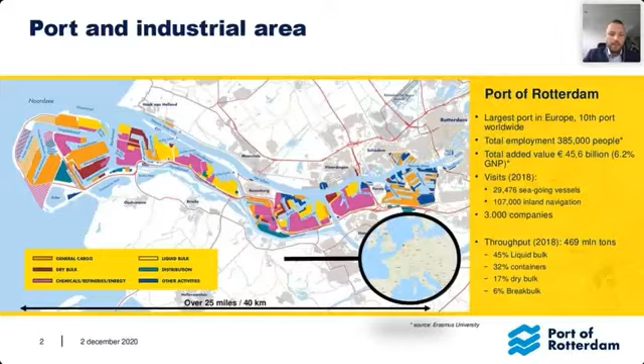So if we zoom in a little bit closer, we see that 13% of the energy demand for Europe represents around 8,800 petajoules. And just 5% of that sticks within the Port of Rotterdam. That 5% represents 20% of the total Dutch CO2 emissions, and in volume, it's around 29 million tons of CO2 emissions, every year.

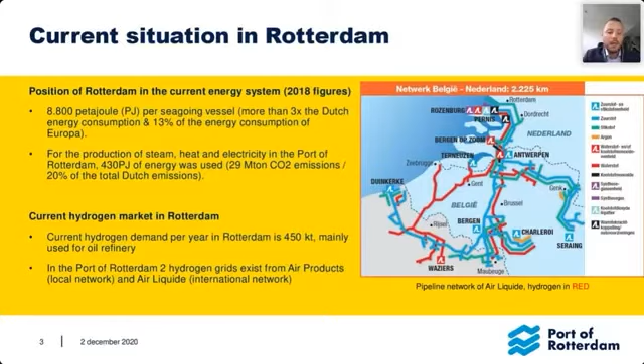And if we zoom in a little closer, we also see that from that 5% energy, there is already a large-scale hydrogen market in the Port of Rotterdam. Almost 500,000 tons of hydrogen is produced and consumed each year in this area. There are 2 pipelines in the Port of Rotterdam, one even connecting the port with different locations in Belgium and France. Those 2 pipelines are privately owned. The one on the right-hand side is from Air Liquide, shown with the red lines. It's the hydrogen pipeline of Air Liquide, connecting the international hydrogen market.

But what I want to do is focus on the 2050 ambition that we have. In this vision, we expect in 2050 around 20 million tons of hydrogen will flow through the Port of Rotterdam to somewhere in the northwestern part of Europe. In that ambition, we took into account a significant increase of energy efficiency in the future, and we also expect that part of the hydrogen production will be done locally, not like today with fossil fuels coming from other regions. So still we need 20 million tons, and we expect that 90% of those needs to be imported.

This can be done from regions where solar power is cheap, converting it into hydrogen and then shipping it towards, for example, the port of Rotterdam. And 2 million tons is what we expect to produce locally.

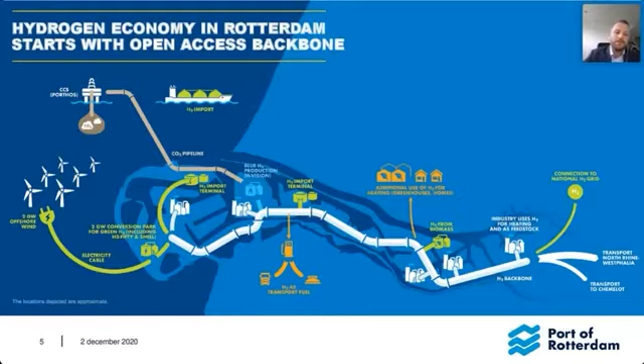To put that in a timeline: in 2023, the first project wants to be operational - that's the backbone and the conversion park, needed for the first electrolyzer that wants to be operational. This is the Shell electrolyzer, 200 megawatt. In 2025, we see another electrolyzer going online, the H2-Fifty project with BP and Nouryon, 250 megawatt.

In 2025, around 500 hydrogen powered trucks via the Hydrox project, and we already see that number increasing. In 2026, the H-Vision project, and in 2030, we see that the import terminal activity over there needs to grow, along with the infrastructure towards North Rhine-Westphalia.

So now let's zoom in a little bit on the green hydrogen production side. We see that really happening in a central place in this area, and the reason for that is two reasons. The first one is that in 2016, we did a study with all the industry in this area to see how can we decarbonize and reduce CO2 emissions to almost zero. We saw that green hydrogen was a significant element in there.

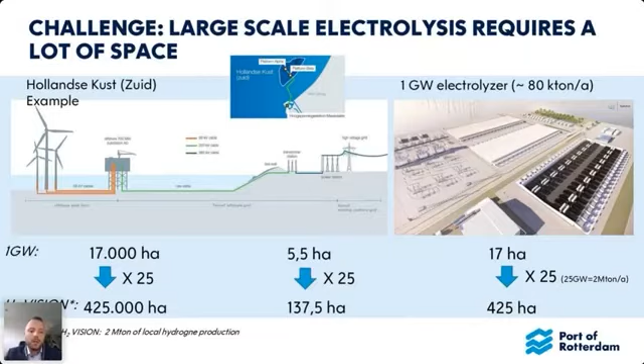If you add it up, you'll see that around 60% is filled on the Maasvlakte, the edge of the Port of Rotterdam, only with conversion stations and electrolyzers. So we have to work on that, because that will not fit - you also need space for the other activities a port is for. So we expect part will be produced in the Port of Rotterdam itself, and part will maybe already be converted on the North Sea, but the 2 million tons is something we can produce at least very close to the Port of Rotterdam.

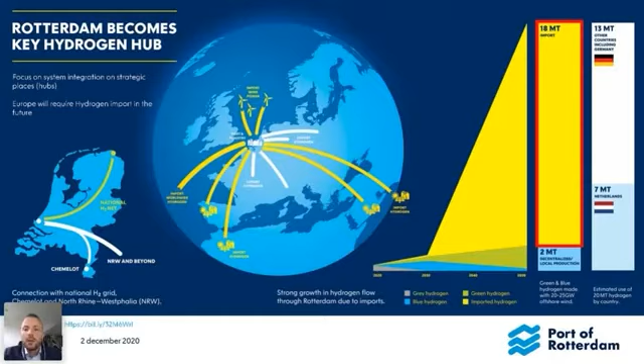But where I started with, and this is my last slide, the 2 million tons is just 10% of the vision. That's the reason we believe that importing from regions like you see on the map here, where you have cheap solar power that you can convert into hydrogen and then ship towards the northwestern part of Europe - Rotterdam, but also other ports - is needed. We definitely see that Europe, moving towards 2050, will still be an importing continent. Thank you very much.

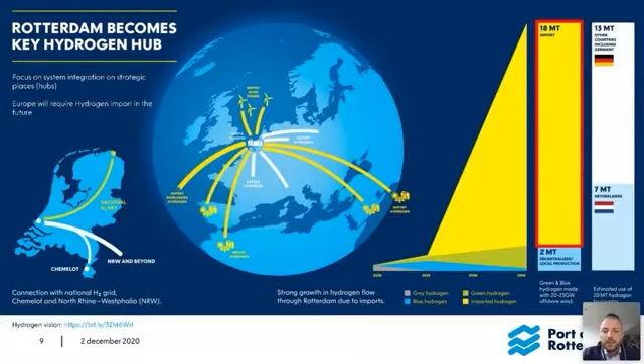That's great, thank you very much Randolf for that detailed presentation. I'm always struck by the practical realities - hundreds of hectares of space required. When we're talking about ports and facilities, where is that space to be found? If that was easily available, it would not be a problem. But especially in the case of the Netherlands, land and terrain is a real question that has to be addressed, and I appreciate that comment.

We've been getting a series of questions coming in, and we'll go back and address those over time. But maybe one question before we go back to Markus - Markus has been able to join us - is about the connections with other ports and port activities. We'll have the pleasure of hearing from Jacob from Port of LA later, but I'm wondering, regarding connections like the transport from Portugal to the Netherlands and other activities, is there an informal or formal network being developed of ports talking about hydrogen?

Well, I think a formal one, not yet. Informal, yes, because we see there is no need for an import terminal if there is no exporting terminal. So basically what we see is that we are in discussion with several countries and ports in order to see how we can develop such a value chain from exporting to importing. So what you see indeed is that informally this is happening, definitely.

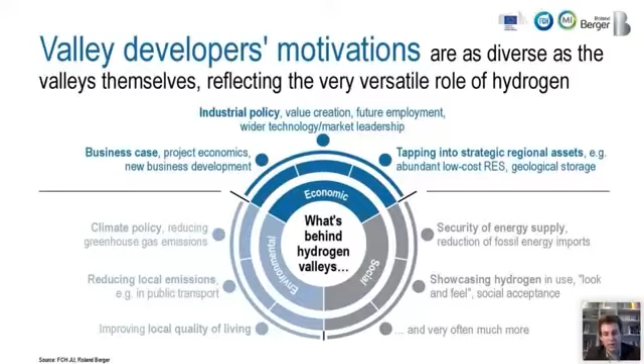And then there are some more, I call them social motivators, where it's about showcasing hydrogen in use, allowing people to get a sense of the look and feel, driving social acceptance, because it's important to achieve that en route to a wider use of hydrogen in different sectors.

We then also looked at what the challenges are that developers face, and we have data here that focuses more on the project development earlier stage phase and more on the actual financing phase.

I think what's quite striking, at least for me, was to see that technology readiness is actually not the top issue anymore, and less than half of the valleys say, okay, well, we have doubts about the technological readiness. I think that's also a sign that we're not really talking about that so much anymore, but rather about business questions, funding, the underlying business case, risk sharing mechanisms, building a commercial structure that works. So that's more important.

And I think that this then also translates into the challenges you see on the financing side. Yes, getting public funding support is still a big topic because there is a funding gap for most projects. But then it's really about typical commercial de-risking exercises to enable financing of a project, which is securing offtake commitments to de-risk the commercial model. So binding commitments from hydrogen off-takers to purchase clean hydrogen, securing private investments, building a financial model, etc. So I think this is overall just a sign, as mentioned before, that the market is maturing.

Another key topic we asked and analyzed is what role does regulation play in policymaking in terms of helping these valleys develop, creating an environment where they can be successful projects. And here, the top issues that come up are related to permitting, which I think is important to note. It's about experience on the permitting authority side, doubts that permits will be available in time, even missing permitting procedures because there's doubts that they are even in place for a hydrogen project.

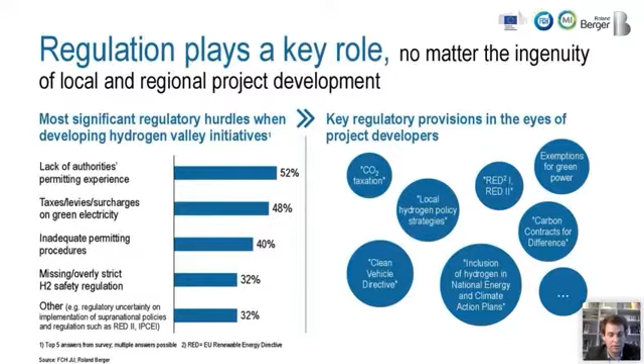So to close, I want to say we didn't only look at challenges, demands, and wish lists from project developers, what they want, but we also will highlight a few things we think are best practices or good practices that we observe, and I think things we can take note of that are quite impressive. So it's really fascinating to see how regions have successfully built on successive projects over the past 10, sometimes 15 years, starting small, now growing bigger and more ambitious, taking on more complexity, more scale to develop a local hydrogen value chain, and how you can really see how one step successively follows the other.

We also learned a lot about effective governance, project management of complex partnerships, many stakeholders trying to accomplish the same thing. Also, how, especially in Europe, project developers have very creatively tapped into different public funding sources at EU level, at national level, but also at regional or state level, because they actually see, for instance in their projects, the different policy agendas and funding priorities of different ministries or agencies converging and being able to leverage many of them in one project. We found a valley that...

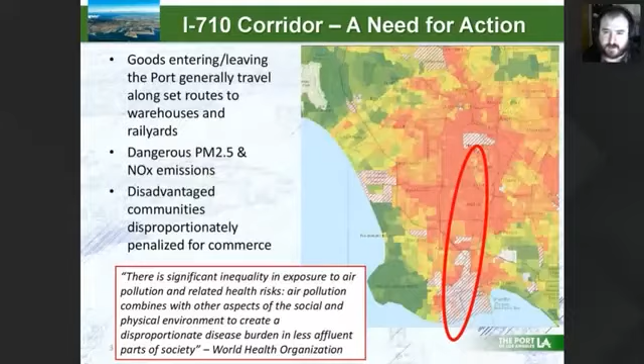Roughly 45% of all containerized goods coming into the United States come in through the Southern California Gateway, either the Port of Los Angeles or the Port of Long Beach, and that leads to dangerous levels of particulate matter and nitrogen oxides in the region, which disproportionately hits disadvantaged minority and low-income communities in our region.

These impacts pressured and culminated in the publishing of the Clean Air Action Plan. This document was originally published in 2006, again in partnership with our neighboring Port of Long Beach. It was most recently updated in 2017. This document came together from a wide-ranging stakeholder outreach process involving the local community, industry, and various regulatory agencies as well. It outlines a series of strategies and goals for reducing air emissions from port operations.

As updated in 2017, there are three primary goals that led to the project we're discussing today. The first is that all container handling equipment at the docks operate with zero emissions at the tailpipe by 2030. For the on-road trucking elements, the drayage trucks as they're known, to be operating again with zero emissions at the tailpipe by 2035, and an overall climate impact goal of reducing greenhouse gas emissions to 80% below 1990 levels by 2050.

So again, I manage our Technology Advancement Program, which was originally established under this Clean Air Action Plan. We've been doing a wide variety of clean technology demonstrations since 2008 on ships, trains, harbor craft, including tugboats, that kind of thing, and of course the on-road trucks, which is the focus of our hydrogen project today.

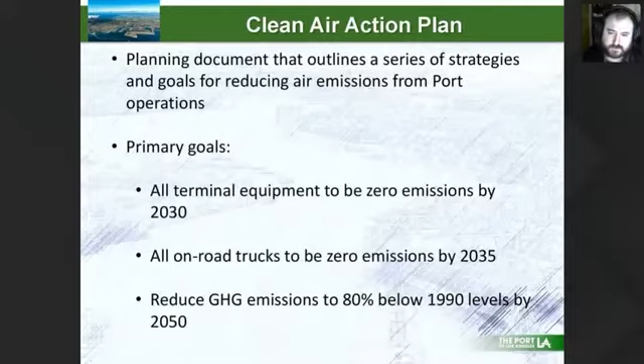So the project under discussion is what we call our Shore to Store project. It's a publicly and privately funded project with a total value of roughly 83 million US dollars, 41 million of which was funded by the California Air Resources Board. This project is looking at the potential for hydrogen to decarbonize the greater goods movement supply chain throughout our region, with a focus on longer distance, heavier duty trucking, and the regional infrastructure needed to support the greater transition to cleaner and eventually fully decarbonized port operations.

The project itself will demonstrate 10 hydrogen Class 8 heavy-duty drayage trucks. These trucks are being manufactured by Kenworth Motors, the third largest heavy-duty truck manufacturer in the United States, in partnership with Toyota, who's building the powertrain for these 10 vehicles.

Alongside those 10 trucks, we'll be developing two heavy-duty hydrogen fueling stations in the region: one near the port in Wilmington, California, and a second at the northern extreme of that red oval from the previous map, in the warehouse and rail yard district known as the Inland Empire region of Southern California, specifically the city of Ontario, California. These stations are being built by Shell, and will combine with a third station Shell is building near the Port of Long Beach, to begin building this hydrogen infrastructure network needed to support on-road trucking as it moves towards cleaner operations.

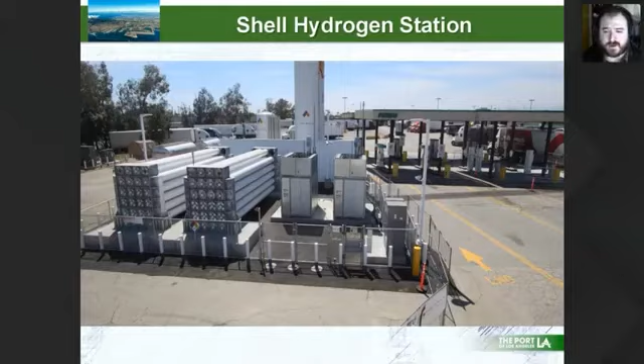Looking forward, the full demonstration is expected to be completely underway by April of 2021. We're looking for a full year of data collection on this specific project. But in the interim, and looking beyond that, we continue to work with our local partners to expand near-term demonstrations throughout the port complex and across the greater region, expanding on the Shell station model and future drayage operations, and back at the port docks themselves, looking at terminal equipment, harbor craft, and so on.

There are a few specific state public funding opportunities that have recently come out or closed for application. The California Air Resources Board, in partnership with the California Energy Commission, just released a large-scale drayage truck and infrastructure pilot grant looking to deploy 50 or more zero-emission drayage trucks at one facility, which we're pursuing with our local partners. Additionally, the California Energy Commission recently closed applications for a grant on hydrogen rail and marine applications, looking at either switching locomotives for freight utilization or commercial harbor craft. We partnered on several applications there, looking at feasibility designs for the commercial harbor craft as well as the infrastructure side and the ability to expand thereon.

So with that, I'll wrap up my presentation here and look forward to future questions and the conversation.

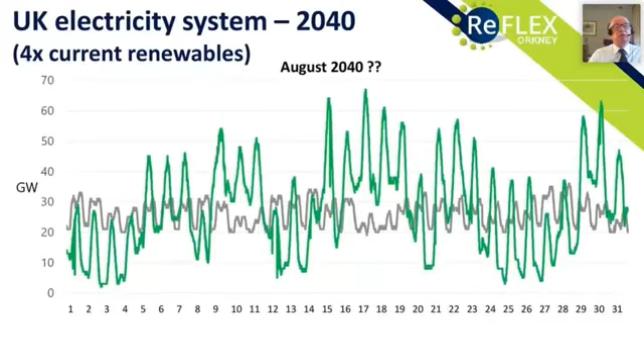And if we look at what would happen if we put a lot more renewables into the network - if you quadruple the amount of renewables on the network - you would get something like this. And in fact this is the UK. What we see in Orkney today is this: we're already in a position where we have an energy system which is already dominated by renewables.

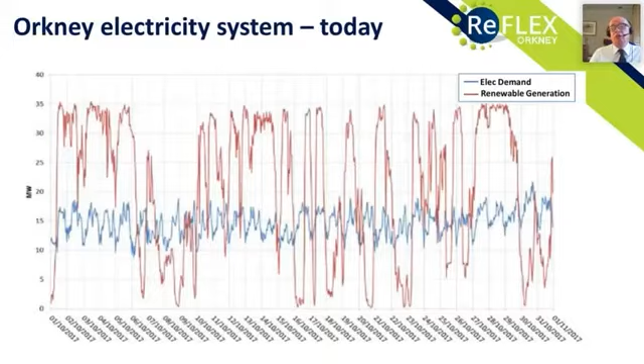So we realized that we had some view of where the future was going to be as more and more renewables had rolled onto the network. And this gives us problems, because you can see the renewable line, which is the red one, is above the blue for a lot of the time, but there are periods when it isn't. So how are we going to store it? What are we going to do with the surfeit of energy that's there? All these questions which everybody's having to grapple with.

Markus mentioned the importance of mobility, and this is what led us to try to find a way to deal with the inadequacies of our local grid. That led us towards working with hydrogen. So we are taking tidal energy, or having taken tidal energy, and turning it into hydrogen as a means to get around the grid restrictions we face at the moment.

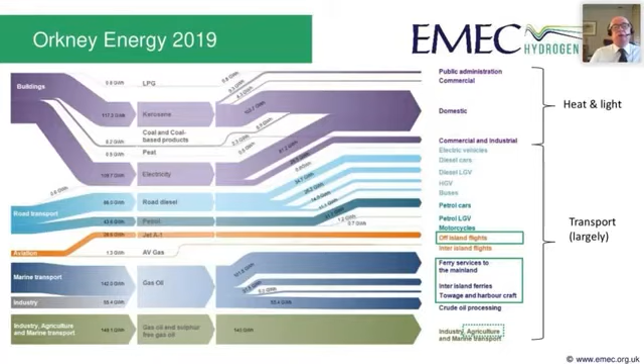I'm going to talk about two particular areas we've been working on that I thought would be of interest to this conference. Those are the areas boxed here: the lower green box is about ferry services, and the upper green box is about flights, because we're doing some work with aviation. So turning first to the ferries.

We started from a position where we were producing tidal energy but couldn't get it all off the island because the cables were too small. So we sought to produce hydrogen initially from the tidal energy we couldn't otherwise export. We put in the electrolyzer, and the bottom right-hand corner shows the corner of half a ton of hydrogen storage. We quickly partnered with Community Energy Scotland and the local community who owned the wind turbine in the background, and came up with a scheme initially called the Surf and Turf Project.

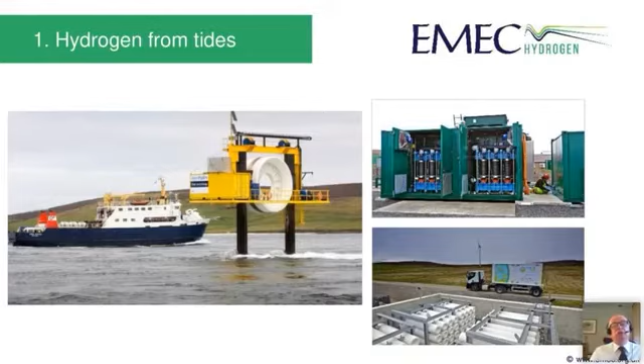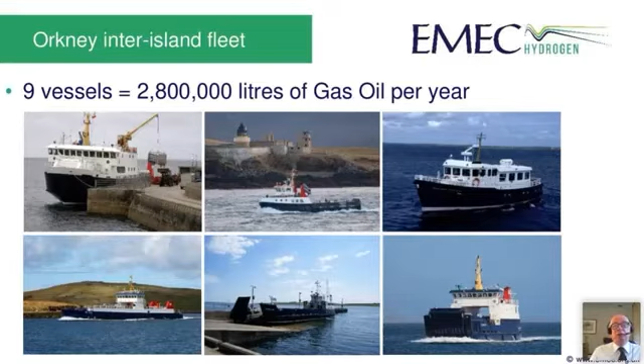That was then expanded, as mentioned earlier, into a project called the Big Hit Project, which looked to use hydrogen in a variety of ways by engaging the community and using their assets. We decided to look first and foremost at whether we could use hydrogen in shipping. That was one of the main areas important to us, because the nine vessels that serve the island archipelago use between them around 3 million litres of gas oil a year. So was there something we could do?

We started our journey by making hydrogen to start with. We had to transport it somewhere on ships and then use it. The initial plan was to use the hydrogen and turn it back into electricity when the tides stopped—in other words, fill in the gaps between the generating peaks.

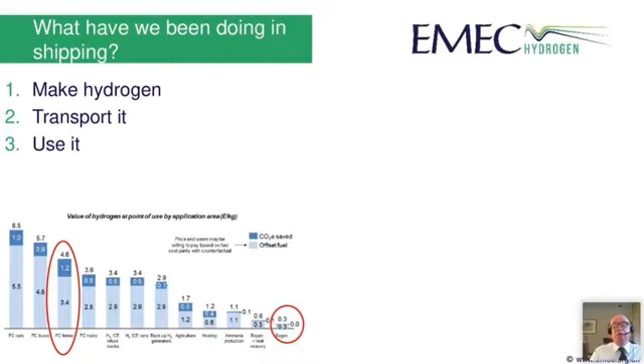But we quickly found, as a result of some work done for us by Element Energy through Exodus, that hydrogen was worth around 30 pence a kilogram if we turned it back into electricity. It was worth £4.60 if we turned it into propulsion fuels. In other words, it's worth 15 times as much if you use it to move things. That led us very much to the projects we were looking at working with ferries. It's an economic thing—it's a most-value thing.

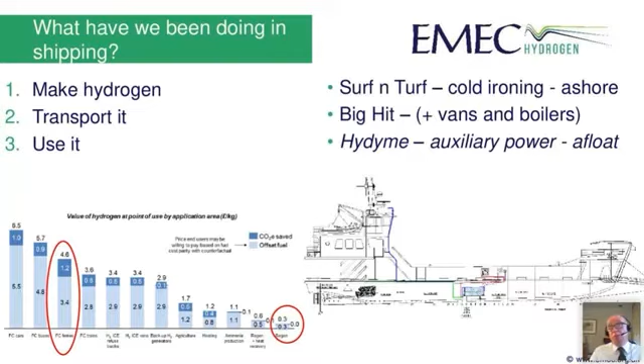So we're working on a number of projects—Surf and Turf, Big Hit as I mentioned, which also introduced vans and boilers, and there isn't time to go into the details now. More recently, we've been working on another project about using hydrogen for auxiliary power afloat in a vessel. That one is in italics because one of the challenges is some of the regulatory issues around using hydrogen afloat—not because the regulations prevent it, they just don't necessarily permit it.

This is a complicated diagram which came out of the UK Clean Maritime Plan. Very quickly: we're starting on the left-hand side with renewables and trying to get over to the right-hand side with an electric propulsion system, and you have to follow a fairly circuitous route of making electricity, turning it into a fuel, storing it, putting it into fuel cells, in a variety of different ways.

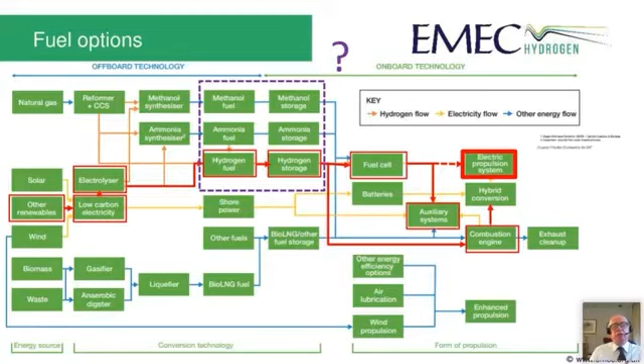But there's one piece I think is often omitted, and that's the section at the top—the alternatives you can make with hydrogen, like making methanol or ammonia. These are areas of great interest to us because we're seeing some of the logistical challenges we'll have if we just handle pure hydrogen, particularly in the shipping environment. So we're keen to work on some of these other areas as well, because I think it was well illustrated in the MariGreen project, which was really about inland shipping, but it showed there are different ways in which you get fuel onto a ship.

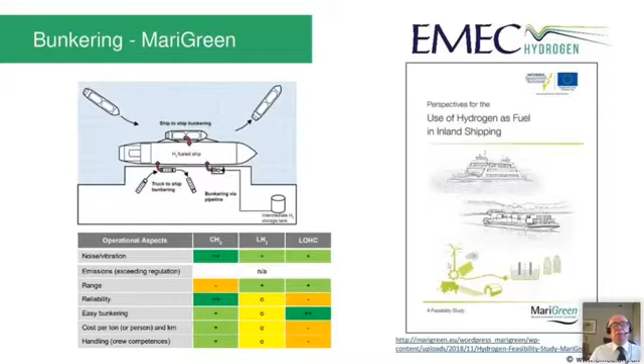The diagram on the left shows you either bring fuel in by bringing a small ship alongside and pumping it in, or you bring it in by truck and put it onto the ship, or you pipe it in from some store on shore. There are a variety of mechanisms, but the issue is that this whole area of the handling of fuels is something that needs considerable effort, and at the moment we think there are still some gaps in the whole process.

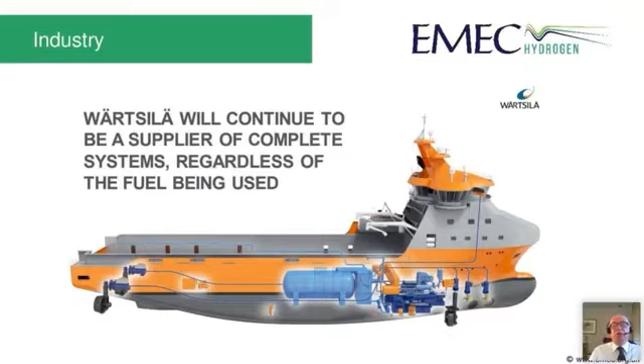It was interesting noticing that the industry is really, as we see it, just interpreting what's been said here, that frankly they don't care what these ships are going to run on, they'll make whatever it takes. So I think we're seeing that industry is muscling up and being ready to make this all work.

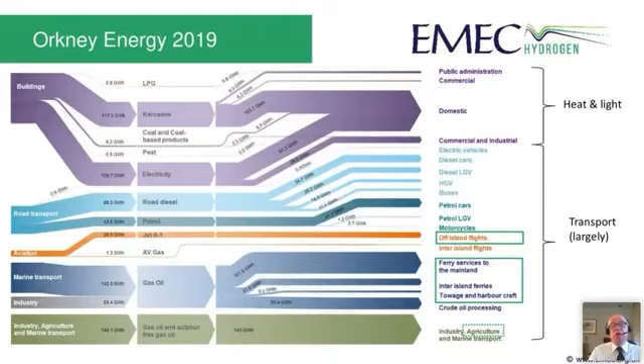Returning to the second of the upper two boxes, the off-island flights, we're also working on other things because another major mechanism of transportation here in the islands is aviation. Now we've got fairly small planes here, turboprop planes, but remember the days when we used to travel? We used to do 180,000 passengers a year, producing nearly 7,000 tons of CO2.

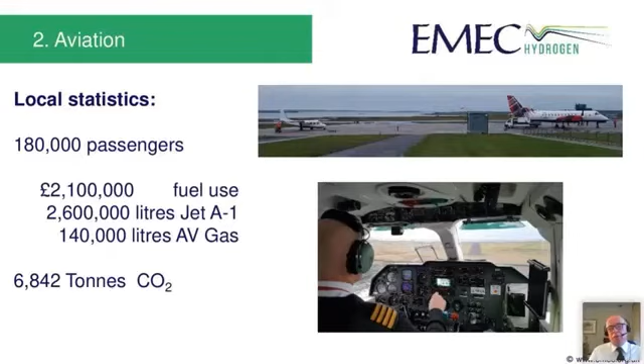So we've been looking at projects, and I'm pleased to say we've been working successfully with a company called ZeroAvia, who have now demonstrated a hydrogen fuel cell running on an electric drivetrain on an aircraft, and we've been supplying the hydrogen into that project. In due course, that'll be green hydrogen working right the way through the whole aviation chain. We hope to do another demonstration flight around Orkney, and we honestly see this as a mechanism that will fill the aviation need for our community.

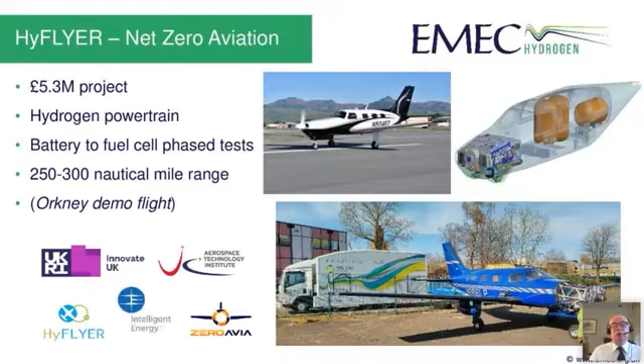So in effect, what we've been doing so far, although not on the scale that Rotterdam or Los Angeles are looking at, is coming at it from a small end, as a practical small scale application. We're learning by doing. We think we're creating actual pre-commercial knowledge through the tasks and challenges we're facing, and we're seeking to get to the point of practical demonstration.

But as I said before, it's often the regulatory restrictions which mean that some things are harder than we might hope. This is one of the key parts for us as regulators to recognise, that regulations are often put in place to do one thing, and then some years later we find they don't permit something else that was never intended at the start. But we do genuinely believe the efforts we're putting in at the moment are making some progress towards net zero.

We think we're doing that at the moment on land, sea and air. The one thing we're really keen to try and expand on is the agricultural space, because as an agricultural community we have a particularly large diesel bill for these sorts of things. So if anybody out there has a plan, or a particular hydrogen tractor or combine, please do contact me afterwards - I'd be delighted to speak to you.

That's all I wanted to say, really, Tim. I'm very happy to take questions, and I hope I've left enough time for it.

That's great, thank you very much, Neil. That's a great summary, and I appreciate the opportunistic behavior - you're really trying to take advantage of things, and hydrogen is playing a key role in being able to do that in a unique environment.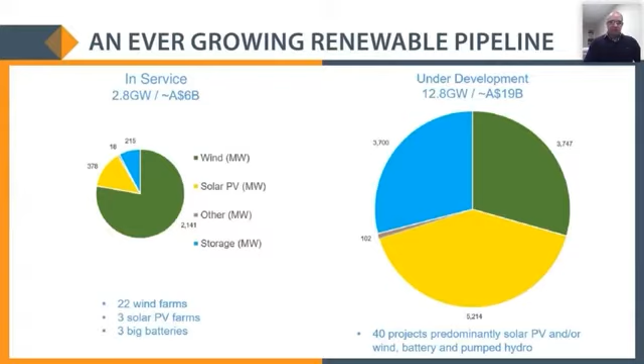Importantly, Port Bonython - I want to talk about Port Bonython as a hydrogen hub today. We heard about the Port of Rotterdam and their challenges around space. Well, the Port Bonython site is an existing around about 1,800 hectare site.

It currently has an existing refinery on there that Santos operate, and they take a feed from a liquids line that comes out of the Cooper Basin in the centre of Australia, runs down to Port Bonython, where they separate the liquids out, and export predominantly crude and LPGs in terms of propane and butane from the existing site at Port Bonython. There's also obviously a berthing facility there. Mitsubishi Heavy Industries own a diesel import terminal there.

Australia is not blessed with a significant amount of refining capacity. It's getting smaller and smaller as time goes on, and so most of our diesel and petrol is imported around Australia. That's the case for South Australia, where fuel is predominantly exclusively imported.

Just around the corner, about 30 kilometres by road, is the Liberty Group's Whyalla Steelworks, which is an integrated magnetite DRI blast furnace and rolling facility. It's fairly ageing, and Sanjeev Gupta and his group have announced plans to transition that facility across to green steel, where they'll be installing an electric arc furnace. They are talking about somewhere between 400 megawatts and a gigawatt of electrolyzers required to provide them with the hydrogen to support their operations, along with renewable electricity from the region around there.

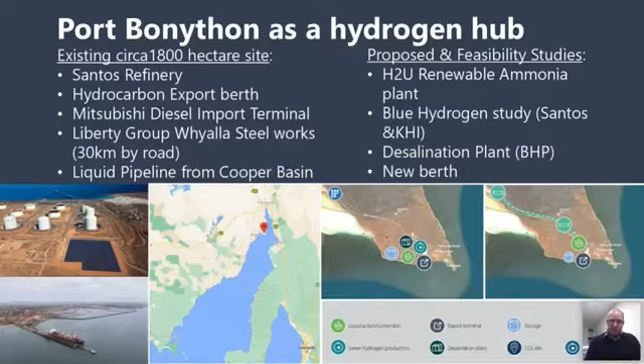If I flick back to the previous slide, you can see the two pictures on the right showing the icons. There's a big sandy beach to the left of that area, which is actually the Australian giant cuttlefish breeding ground. There's a big marine reserve there, and it has been that way for some time.

One of the additional challenges we've identified is that if you're going to produce liquid hydrogen at a hub in Australia, you need to be within about 800 metres of the berthing facility to avoid boil off in pipes, and it can get particularly hot. A bit further north in South Australia we had a heat wave and our hottest November day on record at 48 degrees, about 400 or 500 kilometres north of here. So it does get very hot, and that's something we need to take into account.

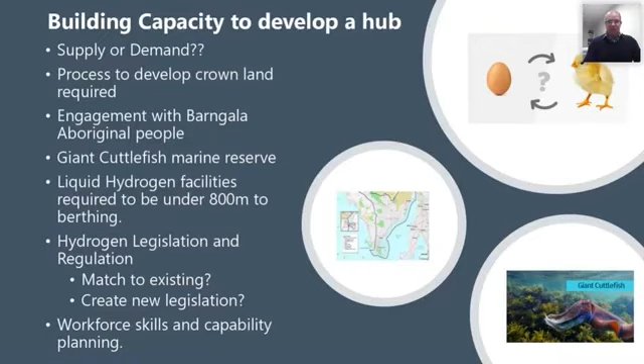Additionally, in South Australia we're under the National Hydrogen Strategy, leading the workforce skills and capability planning. It's been an interesting process - a bit like herding cats. We're working across Australia to understand what industry wants, and the reality is a lot of industry doesn't really know what they need just yet. That's been one of our learnings so far.

From our side, we see hydrogen hubs playing a critical role in scaling up the hydrogen industry, with real opportunity across the energy and mining sector. It was interesting to see Neil talk about methanol and ammonia - we're looking at that closely, talking with OEMs about potential fuels for future use in mining for heavy haul trucks to displace diesel. I think it'll end up being ammonia, methanol, or something similar.

We're seeing the ability to decarbonise steel, decarbonise copper, and we also have critical minerals we can decarbonise through a combination of renewable energy and hydrogen. The export modelling tool we developed supports investors in deciding where and what they'd like to produce, helping them understand a whole range of areas - I'd encourage you to go have a look at that.

Most importantly, we see that international coordination on regulation, codes and standards to support global trade is essential. It's critical to make sure we have a safe industry, and also that our industry is efficient moving forward, so that we minimise the capital outlay and constraints on adoption of hydrogen more broadly.